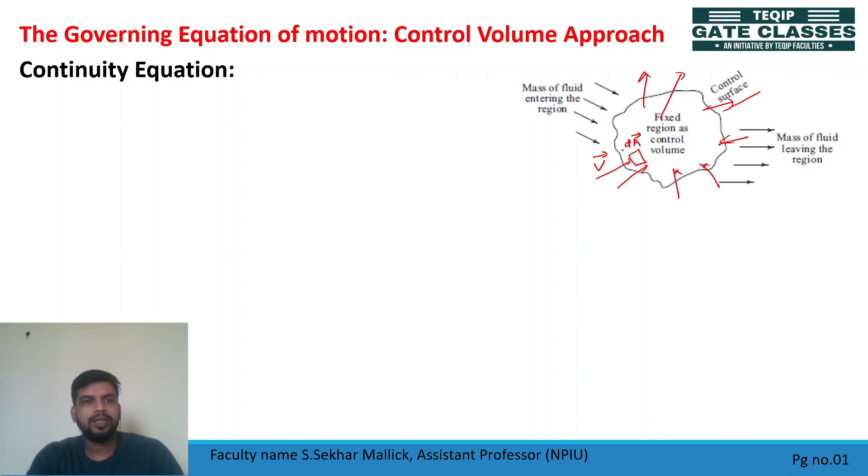Suppose the velocity of entering is V and suppose here we have assumed a small elemental area dA. Okay, velocity vector is V and here this area is normal, dA vector. Okay, now check: rate of mass in minus rate of mass out is equal to rate of mass accumulation.

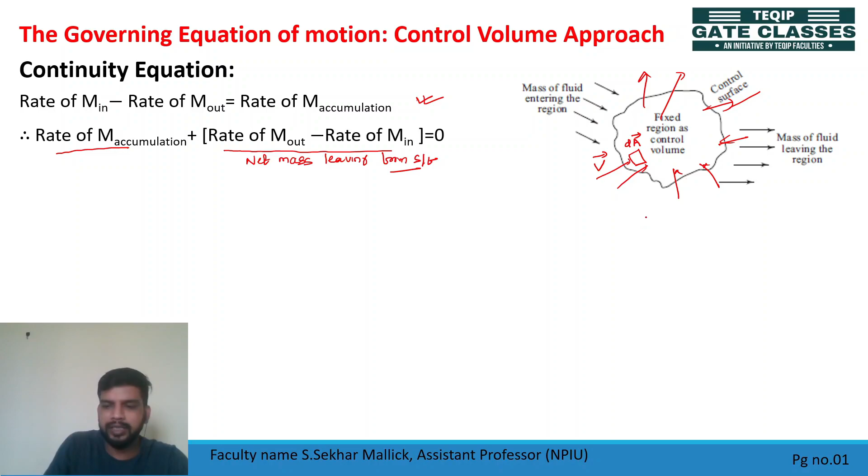So the mass accumulated inside control volume, how much this is, rate of mass accumulation. Can I write here rate of mass is equal to delta by delta t. So this is your change in control volume, mass is what? Density into volume. Can I write this? Similarly, what is rate of mass out and rate of mass in?

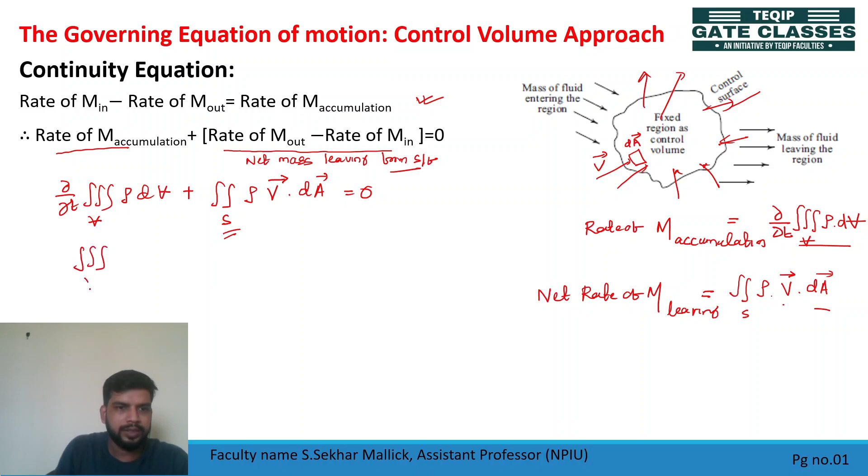Now can we convert surface integral into volume integral? There is a famous equation. By applying that equation you can convert surface integral into volume integral. What is that? Tell me, write in chat box. So I can write this volume integral as del by del t rho dV plus, so I can write this equation as volume integral of del by del t rho plus del dot rho V, dV equal to 0.

This equation is valid for any arbitrary volume, not specific to a particular shape or size. So I can write del rho by del t plus del dot rho V is 0. Right, this V is velocity, this rho is density, this is your divergence. Okay, and we know this is your differential form of continuity equation. Continuity means conservation of mass.

Differential form of continuity equation. Right, and this one is your integral form of continuity equation. This one is your integral form. Okay, so by control volume approach we can derive continuity equation like this.

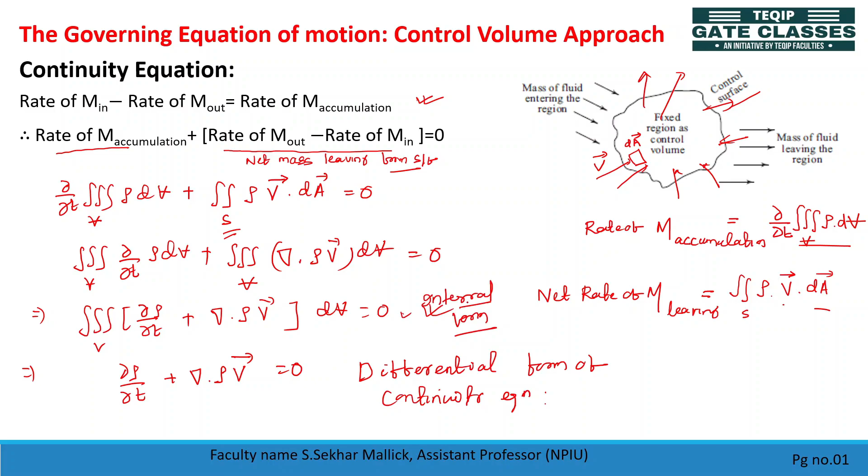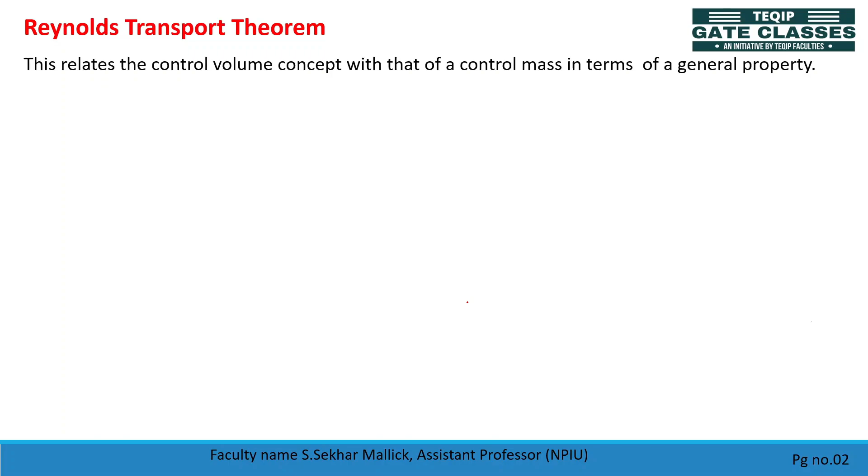Next is Reynolds transport theorem. This is a very famous theorem, and by the help of this theorem we can convert a control mass system into control volume system. So this relates the control volume concept with that of a control mass in terms of a general property. Okay, so for Reynolds transport theorem we have to take a particular property and we will transport that property from control mass to control volume.

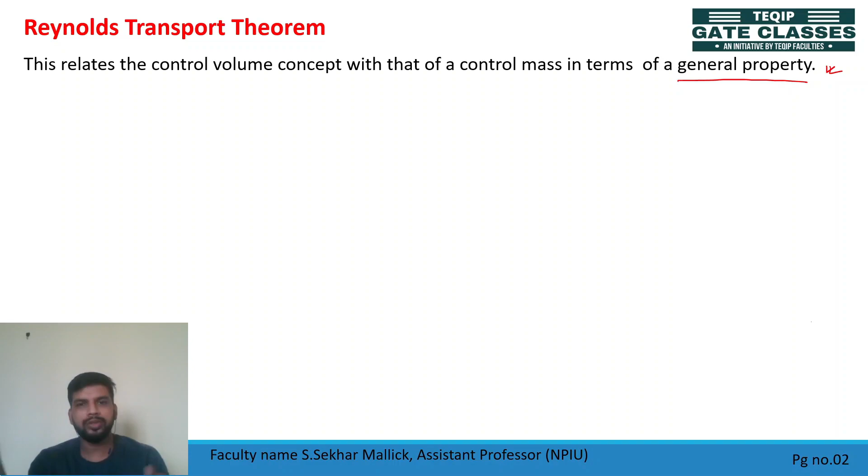See, suppose in the first case, case A, there is a control mass. Control mass means what? A fixed mass.

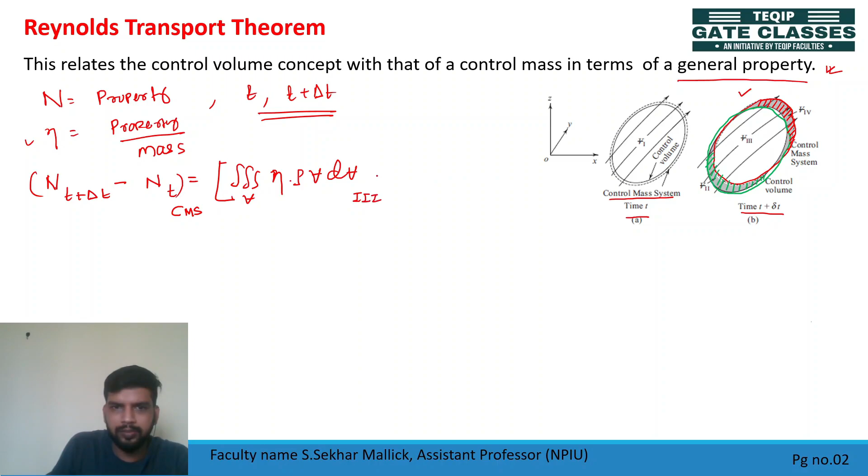So N(t + delta t) minus N(t) is how much, कितना चेंज हुआ है, suppose over the control mass system we are looking. So the change in the control mass system is how much? Then can I write this: volume integral, this property per unit mass eta into rho dV, this is your change in this property, for the region 3, plus eta rho dV for region 4. 3 and 4, this is your new control volume, minus the old control volume

is 1. So you can write eta rho dV for region 1. See, rho dV is mass, eta is this property per mass. So this is the summation of this property for region 3 plus the summation of this property for region 4 minus the summation of this property for region 1. See here, rho dV is mass and eta is property per mass. So if you multiply this, you will get the summation of this property over volume 3 and over volume 4. If you subtract the old control volume, you will get the change in control mass over the time delta t.

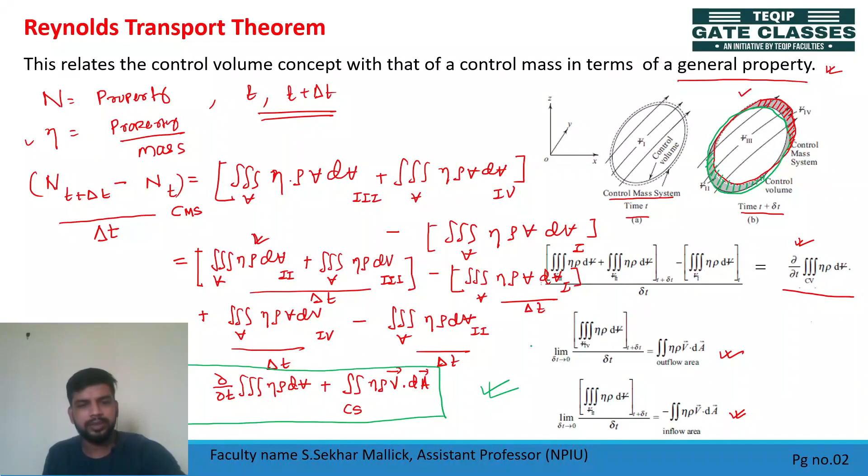This is your Reynolds transport theorem. So the change in the property over time is equal to how much? So can I write this as del n by del t is equal to this much. Let's put this in a box. See, derivation of this equation is not important at all, but understanding of this equation is very much important.

See here the change in property of n with respect to time is equal to this one, change in property of this with respect to volume plus change in property with respect to the surface. Okay, so here control volume, this is your control mass system, and even you can convert this control surface into control volume by taking divergence. So this is the relation of control mass and your control volume, and by this approach we can see how a property behaves in control mass and in control volume and what is the relation between that.

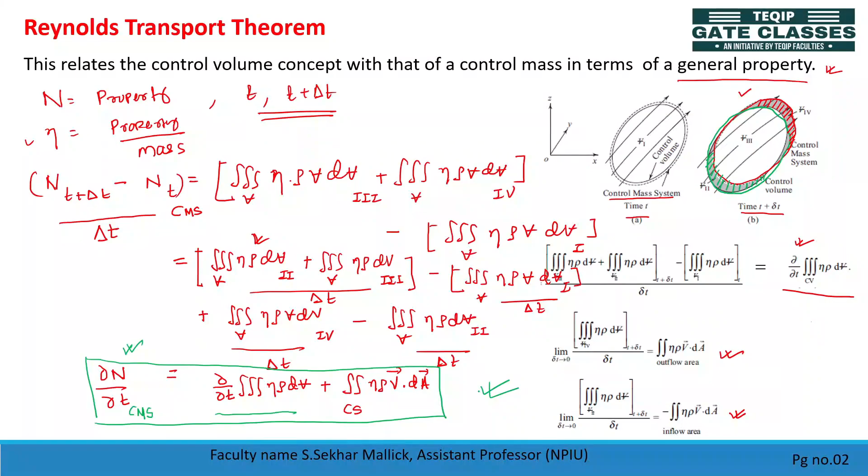Next we will see momentum theorem or conservation of momentum. Momentum can be linear, momentum can be angular.

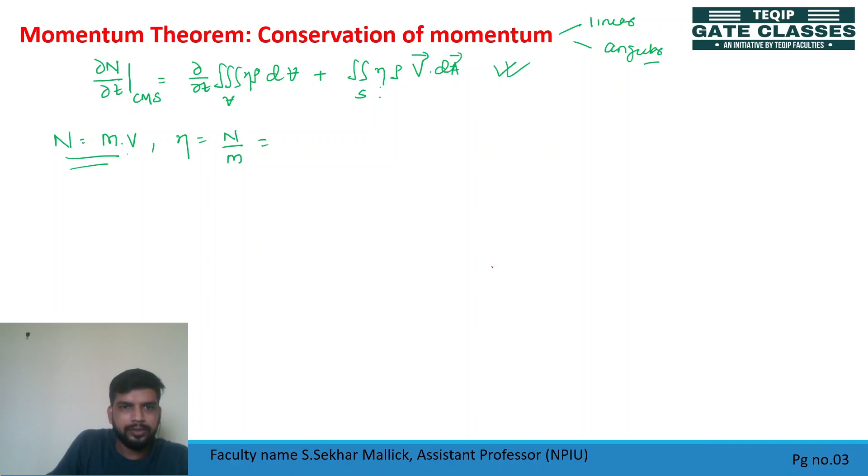So suppose linear momentum, mass into velocity. If property is mass into velocity, it becomes momentum. Momentum is mass into velocity. So what will eta be? Eta is n by m, property divided by mass, so this is equal to velocity. So now you can put the value of n and value of eta in this equation. So this will be equal to del by del t of momentum.

Let's look at linear momentum first. CMS, control mass system. So this will be equal to del by del t volume integral eta; in place of eta you can write v. So v rho dv, this v is velocity, plus, this is surface integral not volume integral, in place of eta you can write v. So v rho v dot dA vector. Okay, so this is your momentum equation. Now you can put this in a box. The linear momentum is this one.

Okay, now you can find momentum equation in Cartesian coordinates, in x direction, in y direction, in z direction; you can find all of these.

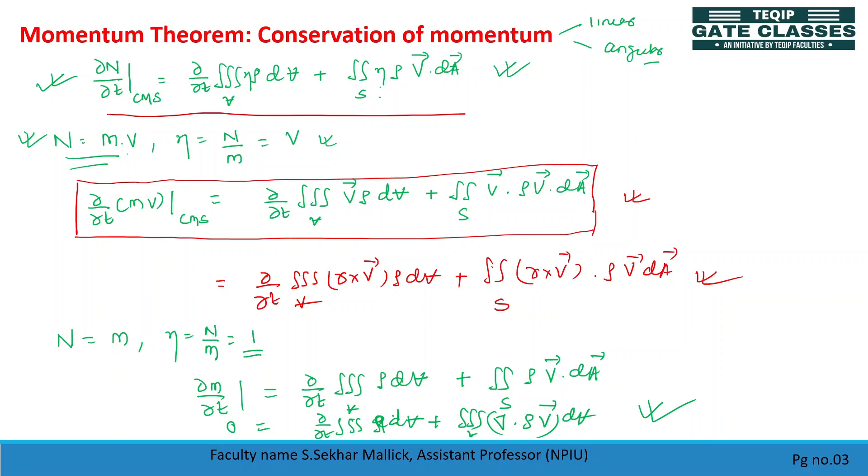So we can find relation, we can derive any conservation equation from this approach, from control system to control volume by using Reynolds transport theorem. Okay, in this slide we will see application of momentum theorem. Okay, so what are the applications?

Here we see force exerted by a flowing fluid on a pipe bend. Suppose you have a pipe bend, and due to this bend what would be the force exerted on the flowing fluid. Then force exerted due to impingement of liquid jets, so this is impact of liquid jet. So if a jet impacted on a flat plate or curved plate, then what would be the resulting force because of that impact. So these are the application of your momentum theorem or momentum equation.

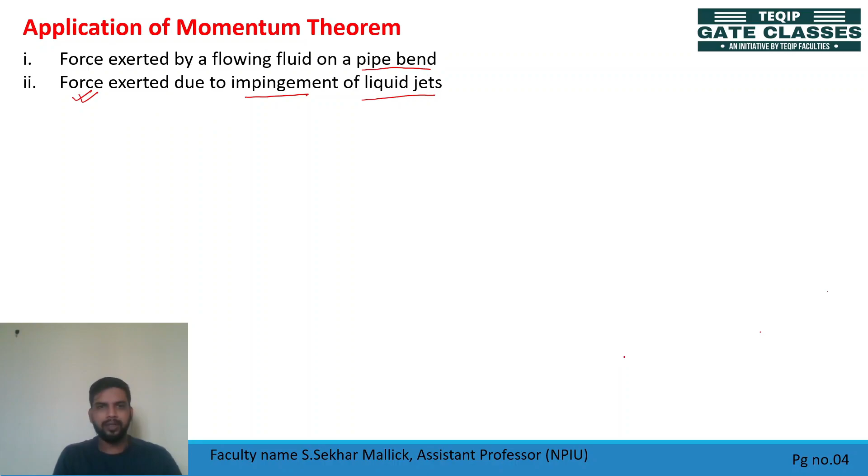We will see here. The first is your impulse momentum equation. What is that? You know, momentum is a conserved quantity. So the rate of change of momentum, we know that force is equal to what? Rate of change of momentum in that direction. So I can write F into dt is equal to d of momentum mv. This is your impulse momentum equation. F into time is what? Impulse, that is equal to change in momentum. So this is your impulse momentum equation.

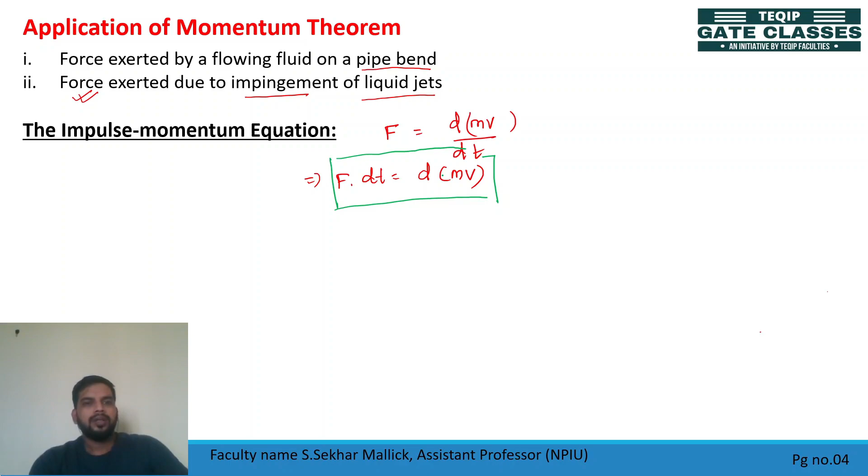This application of momentum theorem, first one is force exerted by a flowing fluid on a pipe bend. Now consider a pipe bend, and we have considered a fluid element at the bend section. So because of this pipe bend, what would be the force exerted on flowing fluid? The fluid is flowing in this direction, this is a pipe. So here the force acting on this fluid element will be equal to pressure. Suppose this one is P1A1 pressure force, and at this section the pressure force is P2A2, and here this angle is theta. Suppose this pipe bend angle is theta.

Suppose velocity is v1 before the bend and v2 is after the bend. Now velocity v2 is making an angle theta with the horizontal, and this force P2A2 is also making an angle theta. Now if you apply momentum equation in x direction,

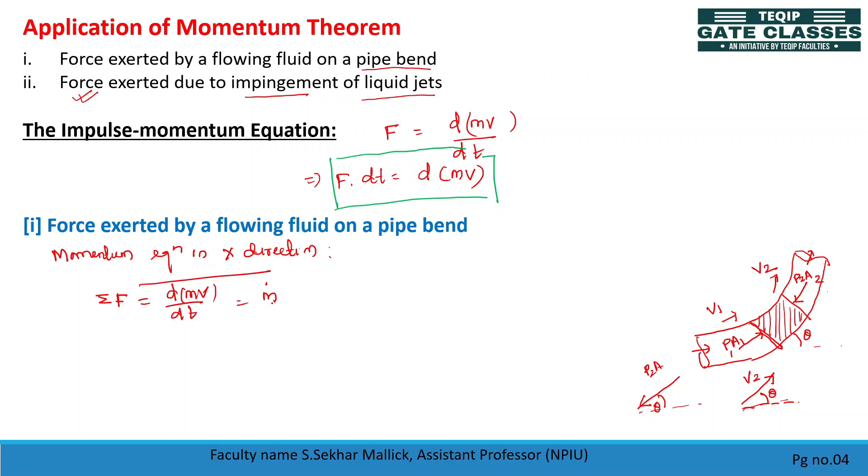summation of force will be equal to change in momentum. So change in momentum means mass rate into change in velocity. So velocity is v final minus v initial, right? Mass dot can I write as rho into volume dot, v final minus v initial. Now this V dot is discharge. So I can write rho Q, v final is v2 and v initial is v1, rho Q (v2 minus v1).

Now tell me what are the forces in x direction? This is P1A1. This one is not inclined, it is horizontal, and this one is inclined, right? So force will be P1A1, then force in x direction due to pipe bend, minus P2A2 component, it's making theta angle. The horizontal component is P2A2 cos theta, minus because negative direction. Then anything else left? No.

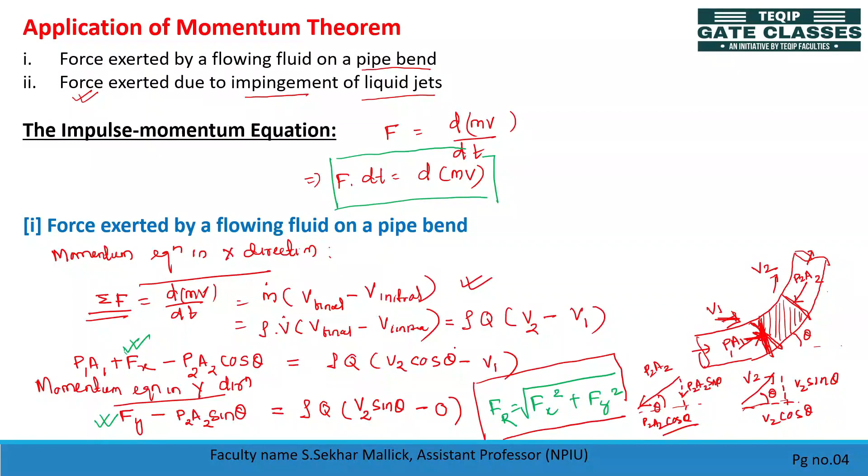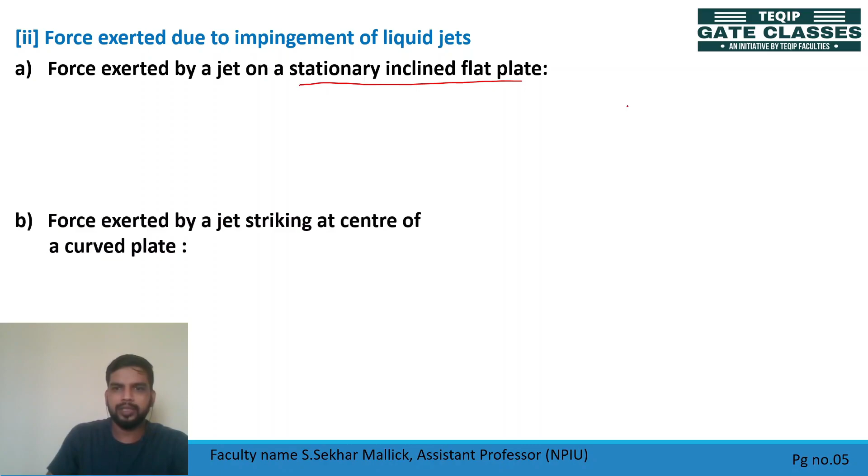So next, let's move to force exerted due to impingement of liquid jet. In this section we'll see first on a stationary inclined flat plate, then we'll see on curved plate at the center and curved plate at tangential. So let's check first stationary inclined plate. Suppose this is an inclined plate, and the inclined plate is making angle theta with the horizontal.

And this inclined plate is stationary, and here there is a liquid jet hitting it, and because of that impact water is spilling over the flat plate. Now if this is the initial velocity of the jet, discharge will be q1 at this side, discharge will be q2 at this side. So what is the force acting in normal direction to the plate, Fn? If we know normal component of the force, we can find force in x direction. This is your force in x direction, this is force in y direction.

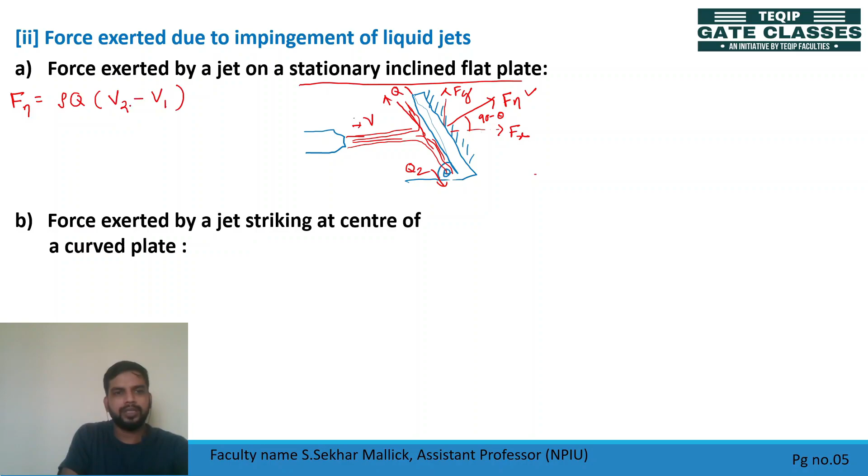So we can find fx and fy components. So first we have to find force acting normal to the plate. Now what is force acting normal to the plate? Can I write this is equal to rho q, then final velocity minus initial velocity, velocity normal to the plate. Rho q is fine. Final velocity normal to the plate is how much? This component is v. So velocity component in normal direction is how much?

V sin theta. Final velocity will be 0 because this plate is stationary, plate is not moving anywhere, so final velocity is 0, and initial velocity in the normal direction is v sin theta. This is the normal direction. So Fn is equal to minus rho q v sin theta. And fx is what? Fx equal to Fn cos 90 minus theta, means sin theta, and fy is what?

Fn: sin 90 minus theta means cos theta. Okay, so we found this. First we found force in normal direction. So for this we need velocity in normal direction. Final velocity is 0, initial velocity is v sin theta, and now at the end you can calculate force in horizontal direction, force in vertical direction.

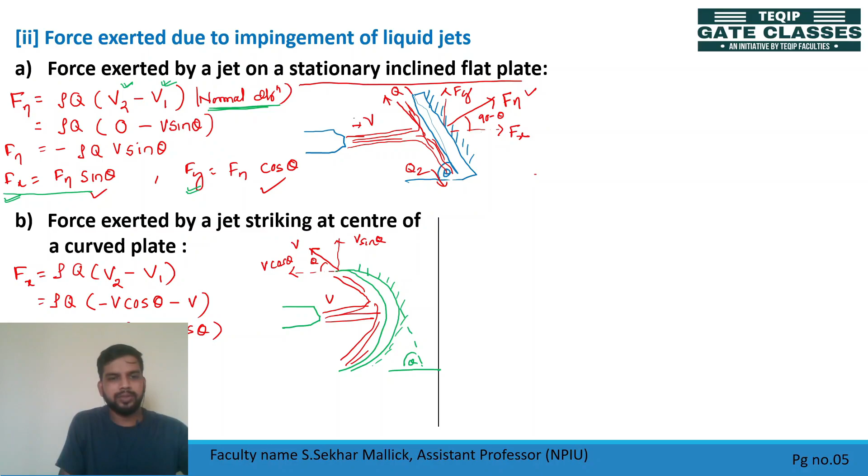Similarly, what is Fy? Fy is rho q times final velocity minus initial velocity in y direction, v2 minus v1. For y direction, what is v2 and what is v1? In y direction there is no initial velocity, initial velocity was horizontal. So rho q v2, and v2 is v sin theta. Y direction component of final velocity v2 is v sin theta.

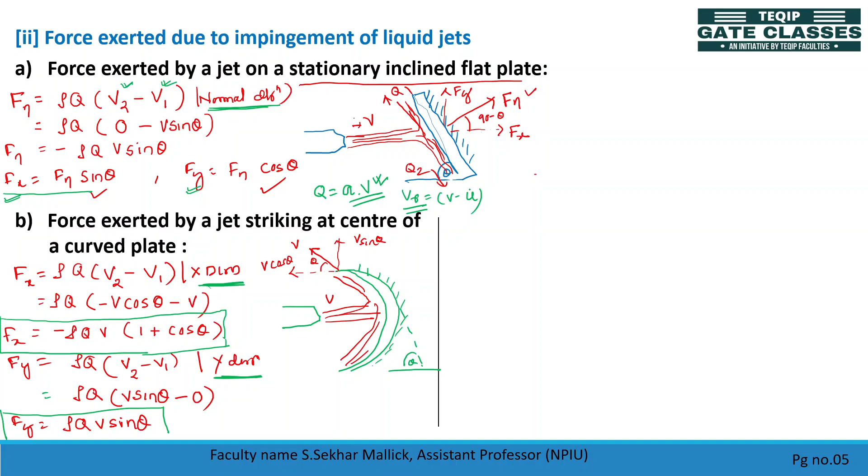Okay. In the next case, case C, force exerted by a jet striking tangentially to a curved plate. That means again we will have a similar curved plate making angle theta with the horizontal, and consider this is a stationary plate first. Here the jet is not at center, jet is tangential, so the water will flow and it will move away from the plate like this.

So at the inlet, this is velocity v, so we'll have some horizontal component. If this angle is theta, horizontal component is v cos theta, vertical component is v sin theta, and at the outlet also we'll have two components. This one is theta, so this is your v cos theta. So applying the momentum equation, rho q times final velocity in x direction, minus v cos theta, then minus the initial, this is positive direction, so minus v cos theta. So this is equal to minus 2 rho q v cos theta.

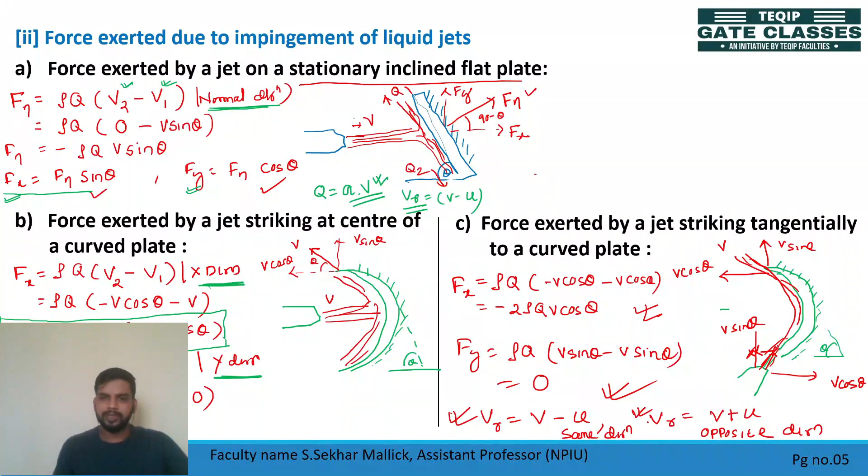Okay, and remember in all these cases we have discussed plates are stationary, and in case of moving plate you have to consider relative velocity. If plate is moving in the same direction of jet, then this is v minus u, and if plate is moving in opposite direction of jet, then relative velocity is V plus u. You have to consider relative velocity. Okay. Now let's see a few numericals.

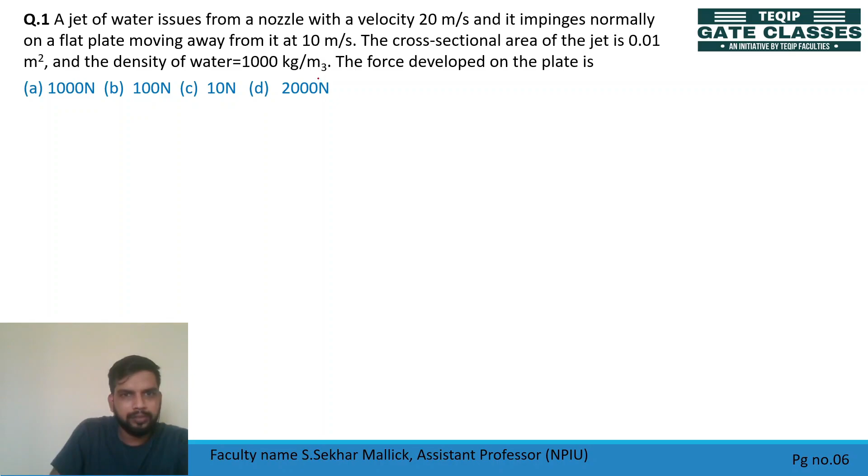First question: a jet of water issues from a nozzle with a velocity 20 meter per second and it impinges normally on a flat plate moving away from it at 10 meter per second. The cross sectional area is given and the density of water is given, kg per meter cube. The force developed on the plate is? Plate has a velocity u, that is 10 meter per second. Initial velocity of the jet is 20. The cross sectional area of the jet is 0.01 meter square.

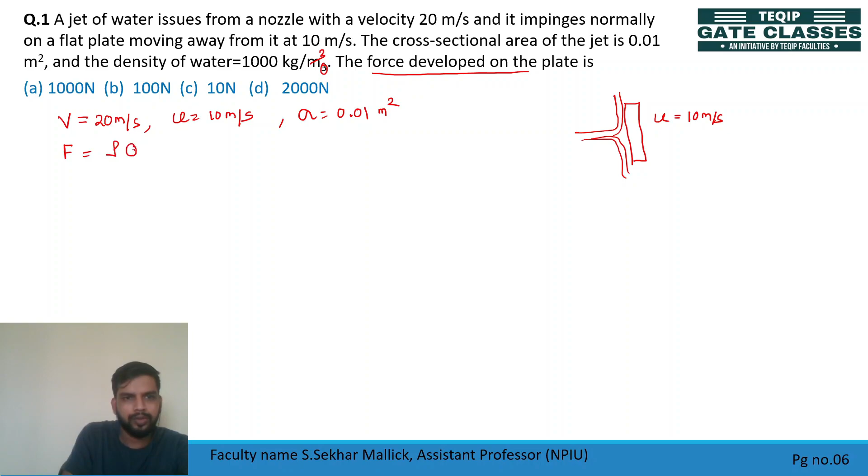There will not be any force in y direction, only force in x direction. F is equal to rho Q, initial velocity 20 and final velocity 10. What is Q? Q is area into velocity, but here plate is moving, so relative velocity; the flat plate is moving away from the jet, meaning same direction, so a into v minus u. So we finally get rho a (v minus u) whole square.

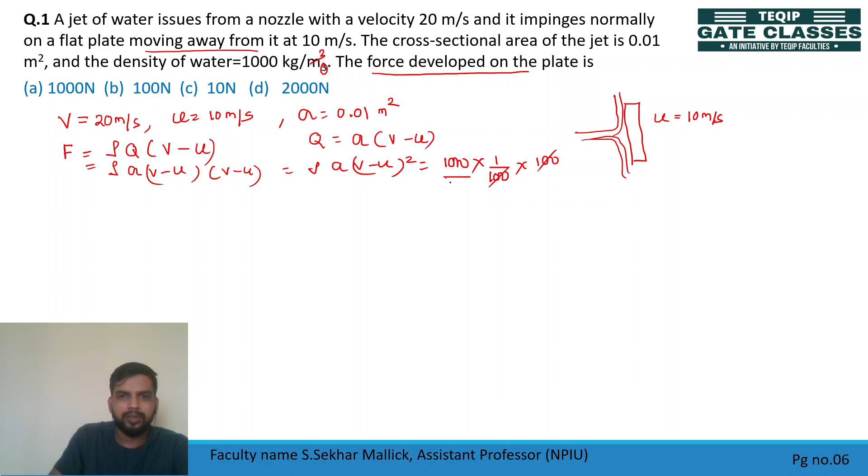Rho is 1000, area is 1 by 100, v minus u is 10, square is 100. So it comes to 1000. So option A, 1000 Newton.

Next question: the water jet exiting from a stationary tank through a circular opening of diameter 300 mm impinges on a rigid wall as shown in figure. Here you have a stationary tank and water is coming from a circular hole, hitting a stationary wall. Neglecting all minor losses and assuming water level remains constant, find the net horizontal force exerted by the wall; take g as 10 and water density as 1000.

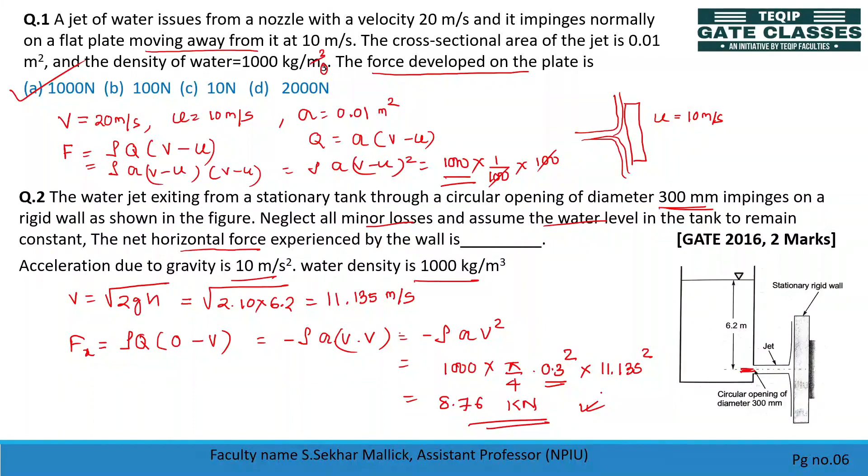In this class we saw conservation equations, conservation of mass, conservation of momentum from control volume approach. We saw the impulse momentum equation, and found force due to impact of jet and force at the pipe bend. In the next class we will see dimensional analysis, dimensionless numbers, and how they are beneficial in finding experimental parameters.